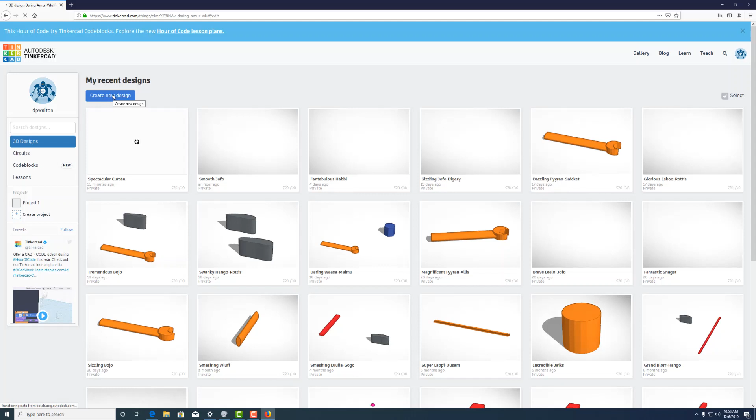We're going to get a working platform on which we're going to do some drawing. This will be a sort of a piece of digital graph paper that will show up here. There's our graph paper. Our tools will be over here on the right-hand side. We're going to grab this cylinder right here, and we're going to drag it right to there.

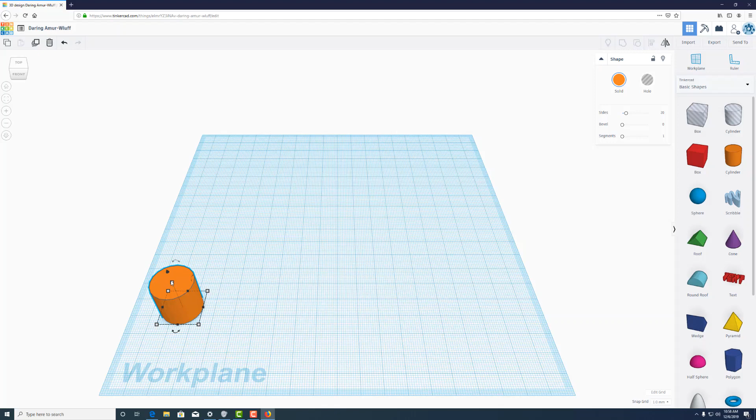Looks good. I got some little squares here; we use those to change the shape and size of our object. I'm going to grab this middle one right there. It says 20 units; we're going to make that 90 units. I'm going to have a big tower here. Grab this lower left one here, make this one 10. Make the one down here...

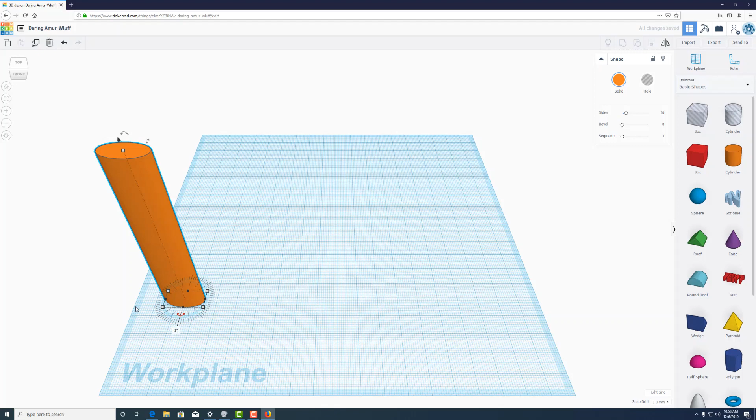5. Oops, not 5 degrees, that is a mistake. Go over here, make that 5. There is our handle right there.

Now I need to change its orientation. Come up here to this little arcing set of arrows right there, and I'm going to drag this so it's flat 90 degrees. Right there, we are good.

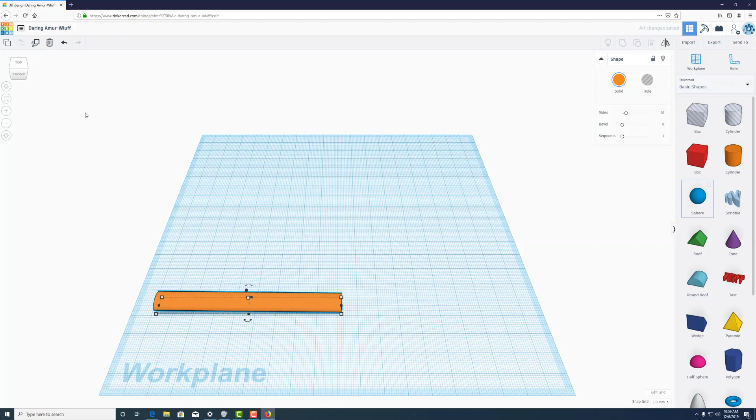All right, let me move it back. So I'm going to drag it over here. And now I'm going to hit the letter D on the keyboard; it'll drop it down to the ground. Select first, D, drop down to the ground. I'm going to go up here to the upper left, get a top view of my object.

All right, I'm going to grab another cylinder here, drag it over there nearby. This one here, I am going to make 6 units tall. So instead of 20... 6.

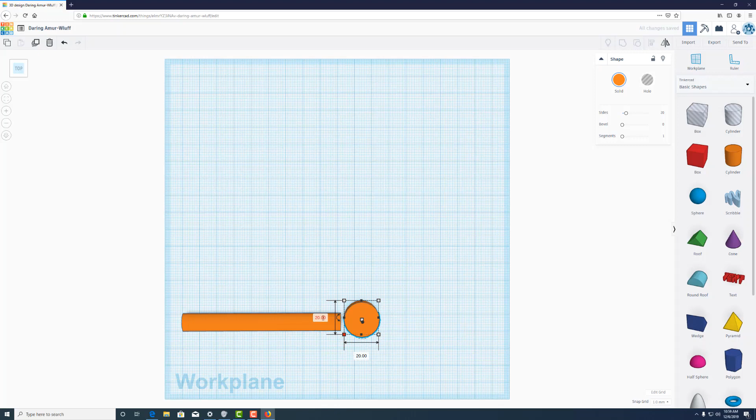All right, now lower left corner, going to make these 14 by 14. 14, 14. There is my smaller circle. I'm going to move this thing right here, forming the end of that end wrench. Of course, now I need to put the tool size in here.

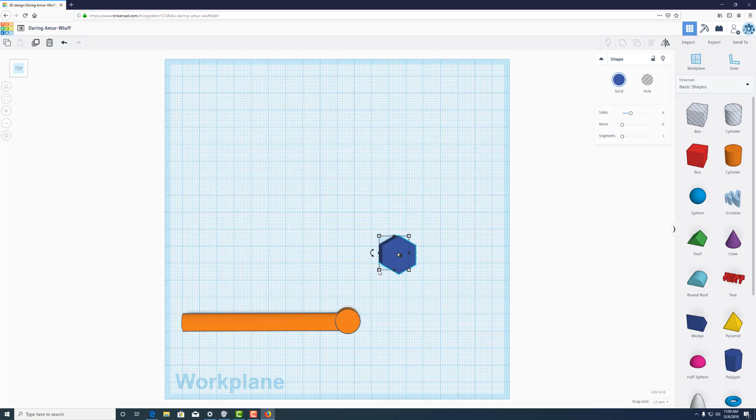So I'm going to grab this polygon over here, drag it over here. I don't care about the height because we're going to make this a cutting tool to cut a hole into the end of the wrench here. So what I do need to do is change its size. We're going to make a 9mm end wrench, so I'll make that 9, make that 9.

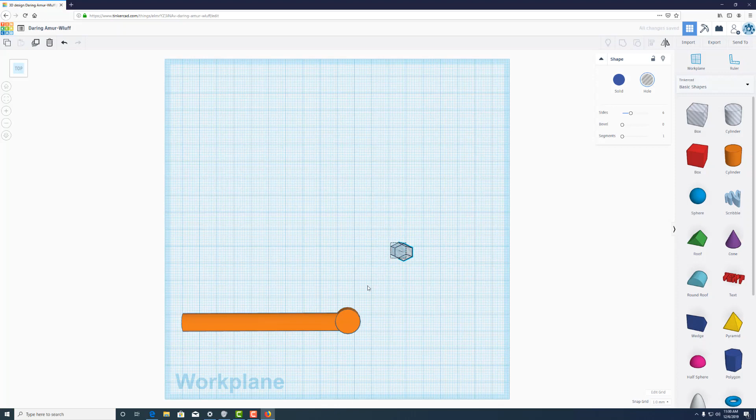There is my shape. Now, to make this a cutting tool, I am going to highlight the thing, go over here to Hole on the upper right, click it there. It's now a wireframe. I can move this close to my object. I'd have to do one other thing first, and that is to basically change its rotation by 30 degrees so it really fits in as a tool would into the end of a wrench.

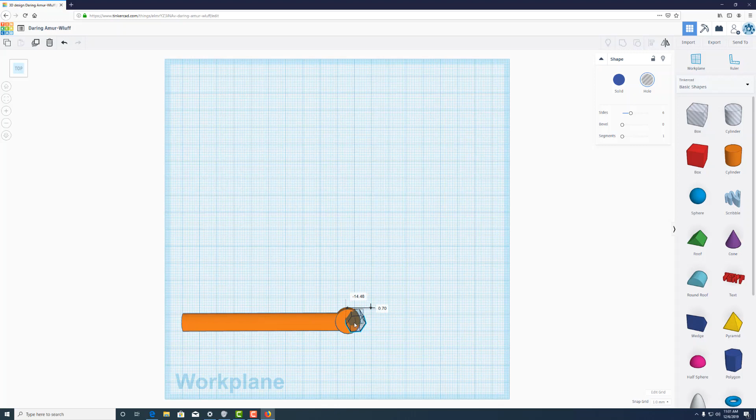Slide it in there, right about there looks good. I can move my screen a little bit. Oh, it looks awesome. Now I'm going to select everything, drag the mouse across, and then hit Unionize. Puts everything together. There is my end wrench right there.

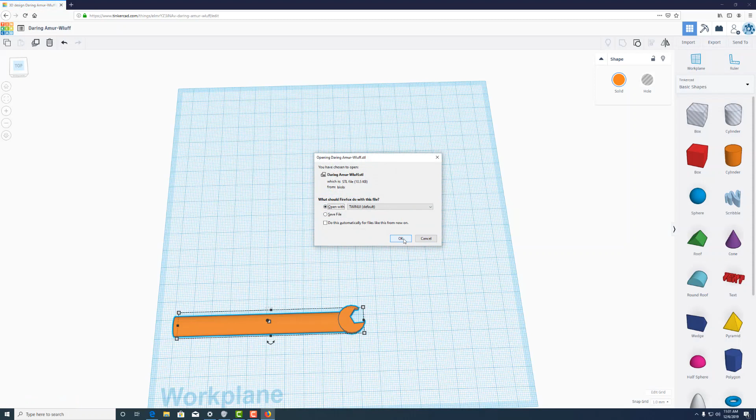And all I need to do now is go to Export. Export as .stl. Hit OK, and I am done. My object is done, ready to 3D print.